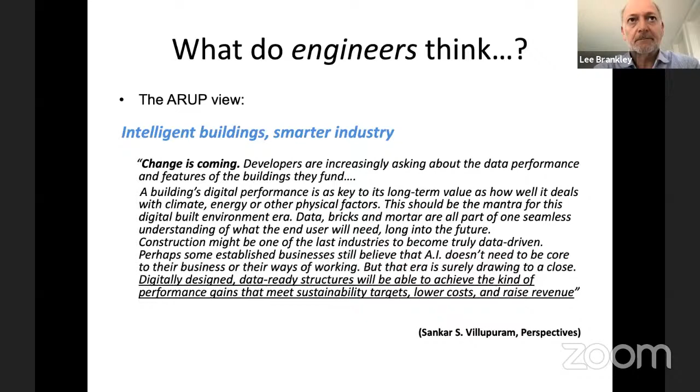But first, I want to go back and look at where we currently are and what has happened across our industry, both in the UK and elsewhere in the world, and how we can learn lessons where things haven't worked out as well as perhaps they should have done in a number of cases.

That brings our attention to a number of construction sector inquiries that have taken place, for example in the UK in relation to the Grenfell Tower, which many of you may be familiar with, a fire that took the lives of over 70 people, and has really been a wake-up call to the whole industry to ask ourselves those searching questions of what we're doing to ensure our structures are safe.

To ensure our structures are both structurally safe and sound, but also, more importantly, how do we ensure the structures are safe for the users, the people that live in those buildings in particular, how do we ensure their safety?

That has been an event that has changed the whole culture of the UK industry. We're now looking at a number of different changes across how products are specified, how they're marketed, how they're certified, and how the information relating to those products is shared across the whole supply chain. That is once again moving towards a digital environment.

There have been other instances, in the Opal Tower, for example, in Australia, and an incident with the MTR Sha Tin Central Station in Hong Kong. We follow these inquiries very closely and look to see what we can learn and how we can do things better.

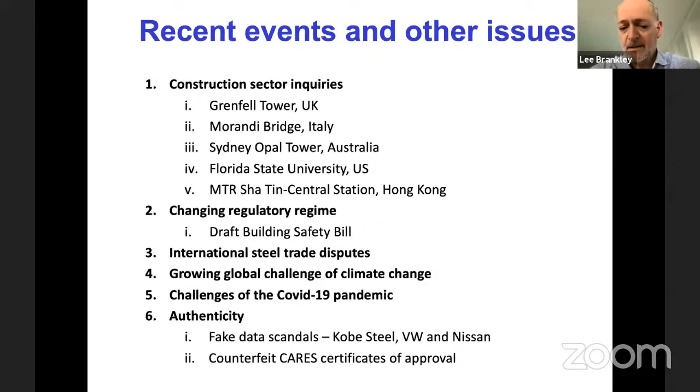We've also seen it with VW with the emissions scandal. And even as recent as the last couple of months in the UK, we actually saw a counterfeit CARES certificate of approval. Fortunately, the engineer was alert enough to call the CARES office and check the authenticity of that particular certificate, and we found it was actually a counterfeit.

That was quite a long introduction, but the contents of my presentation are going to look very much at CARES, a little bit more about our activities in the organisation, and then talk in more detail about the actions that we take away from the construction site in the supply chain to ensure the product quality is what it should be, and then provide some detail about our sustainability scheme and the contribution that we're making to addressing the challenge of climate change.

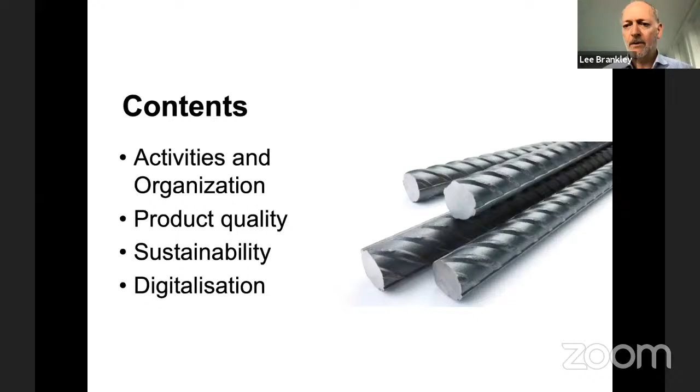More recently, over the last couple of years, we have accelerated our own digital adoption in the sense that we've had to adopt these new ways of working very quickly as a result of the COVID-19 pandemic. And we see that there are real opportunities for us to accelerate that digitalisation of CARES as an organisation, but also the digitalisation of the reinforcement value chain as well.

But firstly, just a little bit about CARES. We started in 1983, and it was a joint initiative between government and industry to provide confidence to the users and purchasers of reinforcing steel through a regime of regular third-party regulation, testing and inspection. That was our aim back then, 40 years ago, and it remains our aim today, and I think it will always be our aim in the future, that CARES is here.

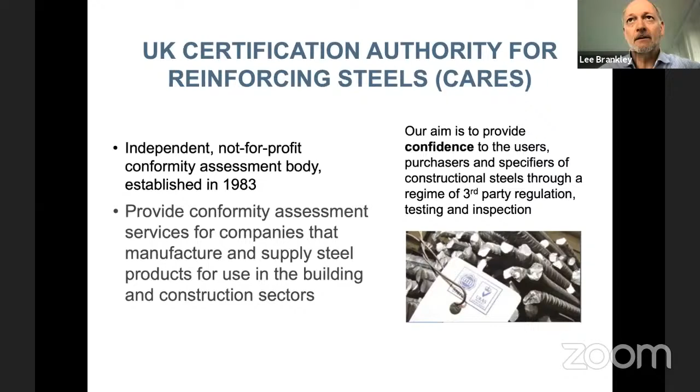We only exist to provide confidence to the users of the products that are certified by CARES and provide that trust in the supply chain that delivers those products to the construction site. And we believe that CARES is a unique relationship across the whole of the reinforcing steel value chain.

We have 4 key stakeholder groups that are part of CARES and are represented through our policy advisory committee to enable us to set the technical requirements for our schemes. In that way, we match the capabilities of the reinforcing steel supply chain with the needs of the clients and particularly the consultants.

So we have the 4 stakeholder groups represented within the CARES policy-making body, and they come together to establish the technical requirements that our auditors use to audit the companies in the supply chain too. They represent the clients and specifiers, consultants, contractors and manufacturers, so they have balanced representation such that one part of the industry doesn't dictate to the others. We believe over the 40 years of CARES' existence, that has been a unique partnership, has enabled us to set the requirements at the correct level and keep taking the industry forward in a positive direction.

The conformity assessment services that we provide are very much based around what we call our product certification scheme, and that focuses very much on the reinforcing steel standards. BS 4449, for example, is widely used in the UAE, but also the ASTM standards. More recently, we have been certifying to standards used in Hong Kong and Singapore.

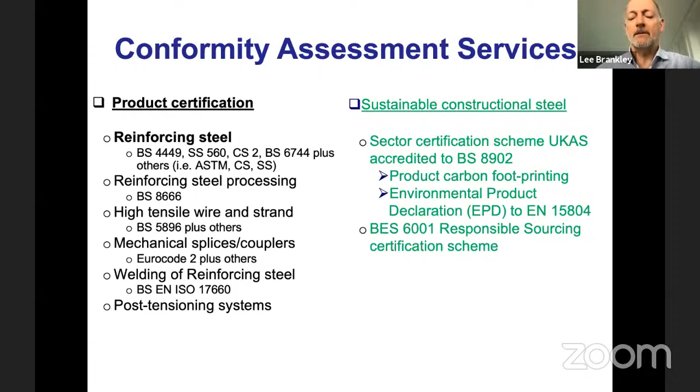CARES is the auditing body that checks manufacturer's capability and fabricators, but who checks CARES? Well, CARES is also audited by a number of accreditation bodies in the UK, that is UKAS, the United Kingdom Accreditation Service, but also in Singapore, we're audited by the Singapore Accreditation body as well.

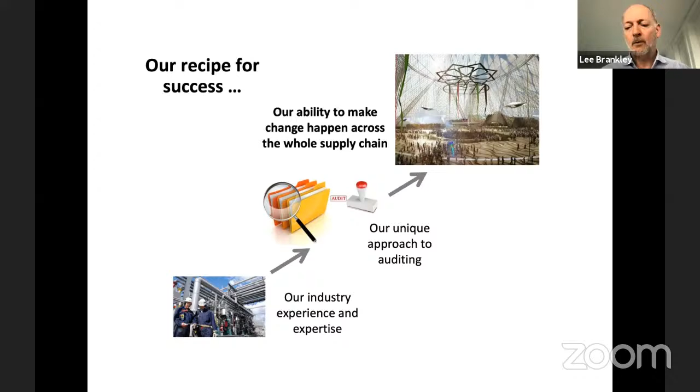And we also have a unique approach to auditing, which I'll talk about in a little bit more detail in a moment. Through stakeholder engagement with clients, consultants, contractors, and manufacturers, we have the ability to make change happen in a controlled way across the whole of the reinforcing steel supply chain.

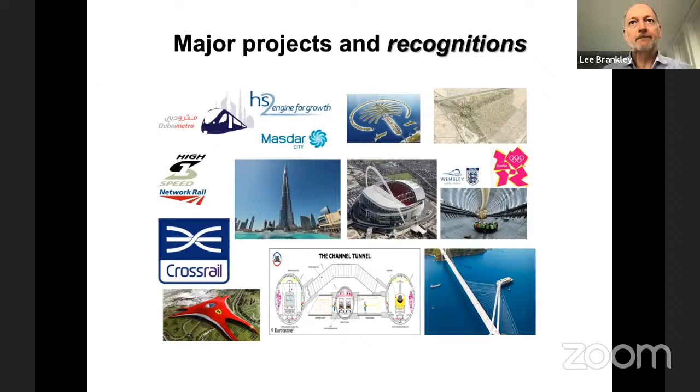Now to move on to the three aspects of CARES: what is it that we do to provide the assurance of product quality, and why can you have more trust in a CARES approved product compared to other construction products? We believe that it's through our unique approach to auditing that provides that extra level of confidence.

We also have a very high level of product testing, which includes independent testing as well, which I'll talk about in a moment. And we also have a unique CARES traceability system. But firstly, our approach to auditing.

To be able to provide that confidence in the product and also the trust in the supply chain, the CARES audit of a manufacturer of reinforcing steel, for example, consists of these three elements.

During the course of an audit of a manufacturer, the CARES auditors will be on site for at least 10 man days to assess the company against the ISO 9001 management system, but also take samples of the product and witness the testing of that product in the manufacturer's test laboratory.

And during that process, we will also ensure that the machines used for testing that product are calibrated, and those calibration certificates are traceable to national standards.

So our emphasis is first and foremost on the product and the compliance of the product to the standard. And then clearly manufacturing processes—a number of complex manufacturing processes are used to make that reinforcing steel product, and they have to be properly controlled.

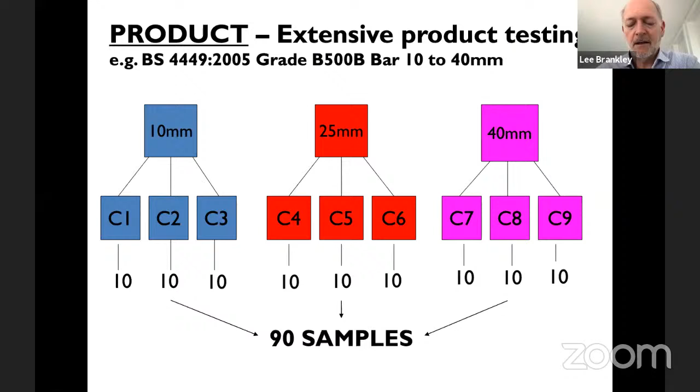Other sizes of the product are taken from that approved size range. So in this case, if initially approved for 10 to 40 millimeter, at the very first audit they would probably sample 16 or 20 millimeter, for example, and we'd cover the whole size range over a period of time. So it's an ongoing commitment to quality by the manufacturer with a very rigorous auditing regime associated with it, providing that very highest level of confidence.

If we look now closely at a certificate of approval issued to a manufacturer, you can see at the top of the certificate we've now introduced a static QR code. That provides us with the ability of using the CARES Cloud app to scan that static QR code and verify whether or not that's a valid certificate, because it's becoming a little bit too easy to create counterfeit certificates.

So whenever you're specifying the CARES approval, you need to get the certificate from the manufacturer and the processor and scan that static QR code, just to make yourself absolutely sure that it is an authentic CARES certificate, because that goes automatically to the CARES Cloud database and will give you in real time verification that it's a CARES approved certificate.

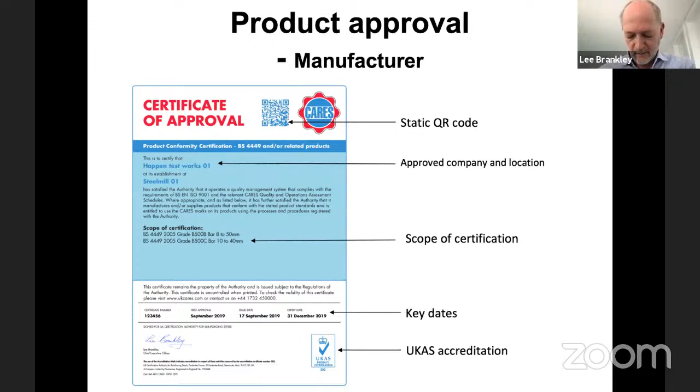And then uniquely for a construction product as well, we introduced a marking system for each individual piece of reinforcing steel bar. So this bar mark, as we call it, appears at least once every 1.5 meters on each individual piece of rebar from that CARES approved manufacturer.

And that marking starts with the CARES mark, the dot dash dot. The country is the next part of the marking, and then the final part is the mill. So it really is as simple as 1, 2, 3.

One of the ones that you may be particularly interested in is the environmental product declaration, which includes the carbon footprint, or what we generally refer to as the global warming potential as well. I'll talk a little bit more about that in the next couple of slides.

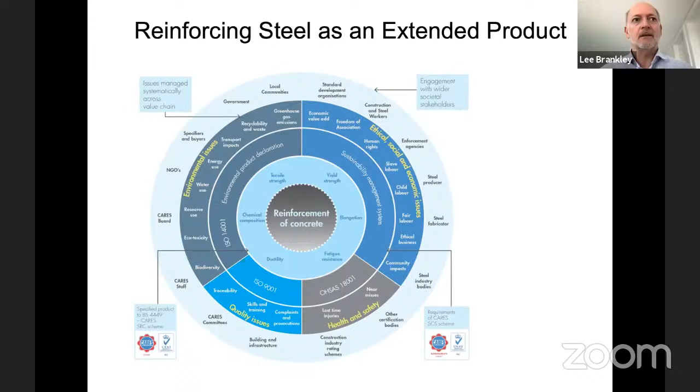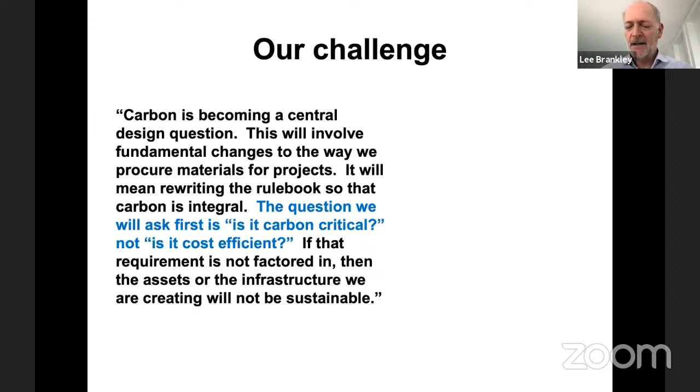So this is where I sort of like to ask all of us collectively, particularly now in relation to climate change, the challenge about this is a quote made some years ago from a leading engineer, and he basically asked the question of all of us. We should be asking: is our design the most carbon efficient? Because we should be looking through the lens of carbon now for all of our future designs.

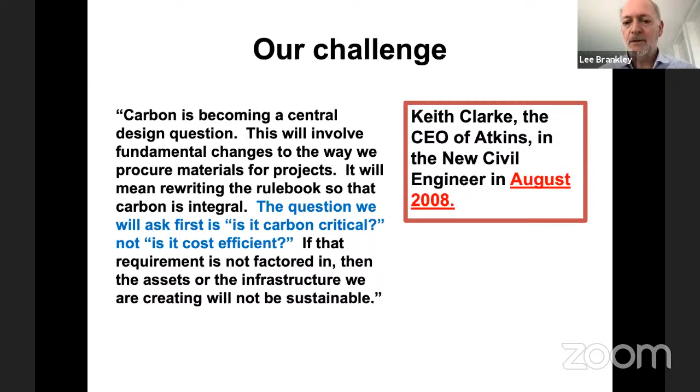But sadly, that question was asked back in 2008, as I mentioned at the beginning. Unfortunately, I don't believe we've made as much progress as we should. But as we approach now the intergovernmental conference coming up in Glasgow later this year, called COP26, there's going to be a whole new renewal around embracing and looking at all of our designs from a carbon perspective. And fortunately, because CARES introduced this scheme over 10 years ago, that data in relation to the carbon footprint from the reinforcing steel from those CARES approved producers is readily available.

And just looking a little bit more closely at the environmental product declaration, you have to draw the system boundary, which in the case of reinforcing steel covers the transport from raw materials, the steel making and casting, the rolling operations, and then the transport to the processor, processing by the processor, delivery to site, installation and use.

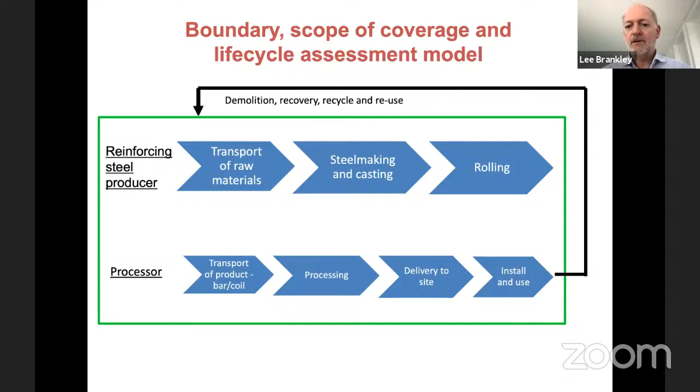So it covers the whole life cycle of the reinforcing steel product. And then what does the EPD look like?

Well, this EPD is taken from the BRE website, BRE Green Book Live, where we can go and obtain all of the CARES EPDs.

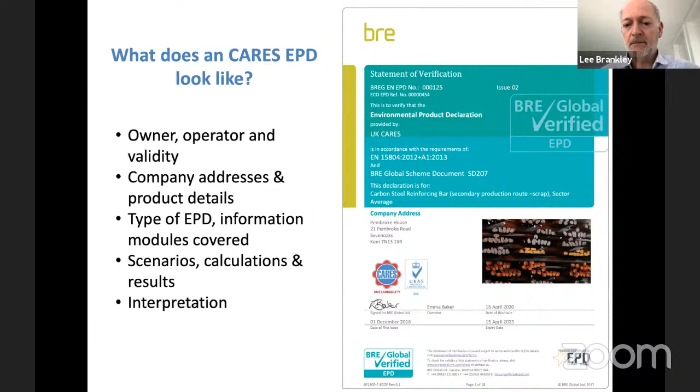And this is a particularly useful one because this is what we call a sector average EPD. It takes a number of manufacturers of the same reinforcing steel product using the same manufacturing process, in this case scrap-based electric arc furnace production. So you can identify what a typical value is for that particular steelmaking route and for that reinforcing steel product, and use that as a benchmark to compare for your initial design. That information is readily available to you.

As with all of our schemes, we regularly review and update their technical requirements from time to time. And we've recently launched a new version of the scheme, which will provide a summary performance certificate looking at the product quality, the environmental aspects, the social aspects, and the economic aspects.

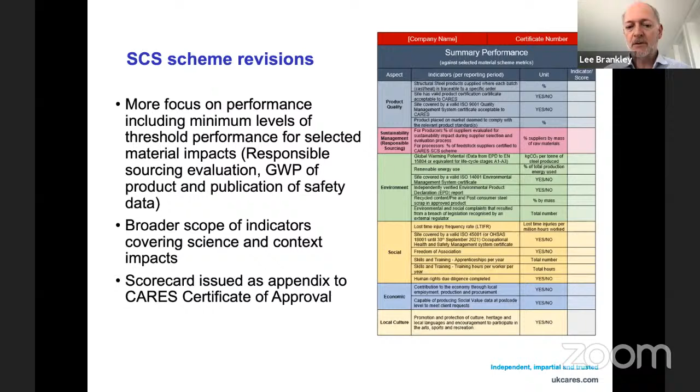A further element of sustainability is the local culture—what is the company doing to promote and protect the culture, the heritage, and the local languages, etc. That's really important because we know that the steel manufacturers and the communities where they're located are really the heartbeat of those local communities in terms of the value they bring, career opportunities, and really good jobs for the people that work at the steel companies.

Our third leg is around digital transformation. What are we doing as CARES to try and facilitate the adoption of digital working across the whole of the reinforcing steel supply chain? So we have taken a technology-driven approach based on our leadership across the industry, and it's one of those areas that really does need creative thinking, innovation, and most importantly, collaboration.

Because when we want to provide the information to others in the supply chain, we have to ensure that there are proper rules in place and protocols about sharing the information.

And I mentioned earlier that in many other sectors, there is the ability to see exactly what product or component was installed in that particular structure. But unfortunately for the construction sector, it isn't yet possible to be able to do that.

But one of the important things moving forward will be what we call the digital golden thread of information, which will be the product test results for a particular batch of steel rebar that has been made and then travels across the supply chain and is used on a particular project. We'll be making that available through our digital traceability system.

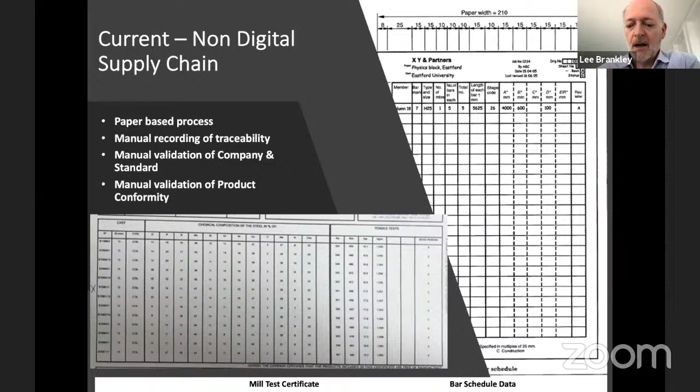Because at the moment, you're probably seeing lots of these paper-based documents being passed around, whether it's what's referred to as a mill test certificate, shown there in the bottom left, or a reinforcement bar schedule. So we're probably still seeing faxed schedules, emailed schedules, and all things in between.

So what we have been working on over the last couple of months is to try and better understand the reinforcing steel process, and then how that is developed across three main processes. The first one that we have to do is to ensure that the building is constructed in a way that it satisfies the design codes.

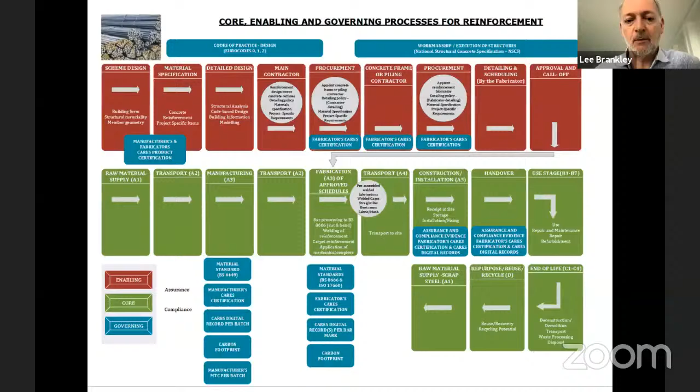And just to look at that in a slightly different way, the CARES digital supply chain is looking really at the steel maker, the manufacturer, and the steel fabricator. Already, we have developed what we call the CARES upstream cloud, which is for the manufacturer to upload the test data in relation to the products that they're releasing under the CARES product conformity scheme. And when they upload that data, it also goes through a validation process to provide, once again, that higher level of assurance that any reinforcing steel product that carries the CARES mark has been through this additional validation process, and its results are available from the upstream cloud.

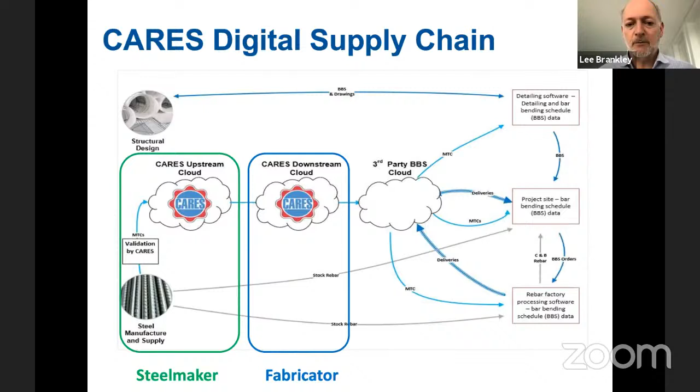And then currently under development is what we call the CARES downstream cloud, and that's for the reinforcement fabricator who receives the physical material from the manufacturer and then processes that into cut and bent material before they deliver it to the construction site. And during that fabrication process, the fabricator is required to use the downstream cloud to make the relationship between the construction site, which is effectively the bar bending schedule, going down the supply chain, but then going up the supply chain, we're able to make the relationship between the individual cast or batch of reinforcing steel and the results that are available from the CARES upstream cloud. So that would make the process much more efficient, much more robust, and much more reliable and trustworthy.

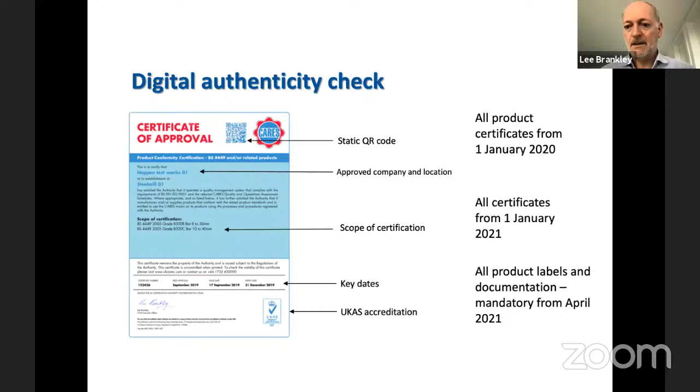As I mentioned earlier on, we have the ability now to undertake a digital authenticity check by scanning the static QR code on the CARES certificates of approval. And why is that necessary? Well, because we have seen fake certificates emerging in the UK market. As I said, fortunately, when it was presented, the person it was presented to was aware of CARES and knew to phone the office and determine that it was actually a fake certificate.

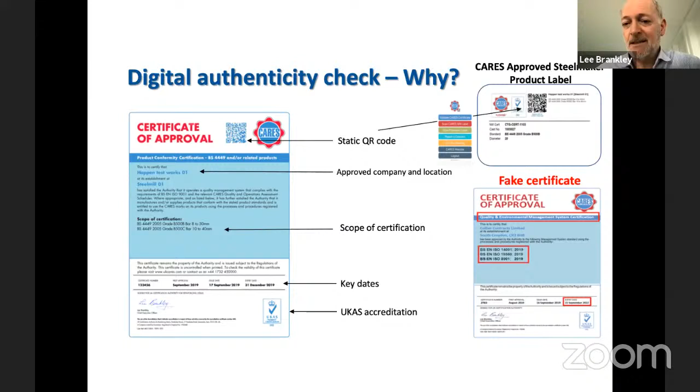And then the other thing we can do now as well, with the static QR code, is that it's also going to be available on each individual label from the manufacturer of the reinforcing steel, and also the processor of that reinforcement steel. So when it arrives on site, you can scan that static QR code, determine who supplied it and what their scope of approval was at that particular time.

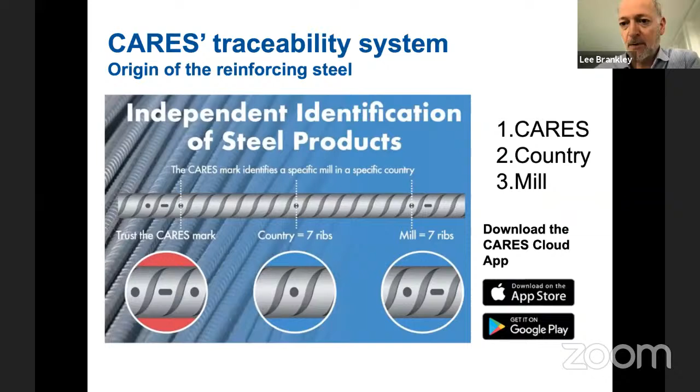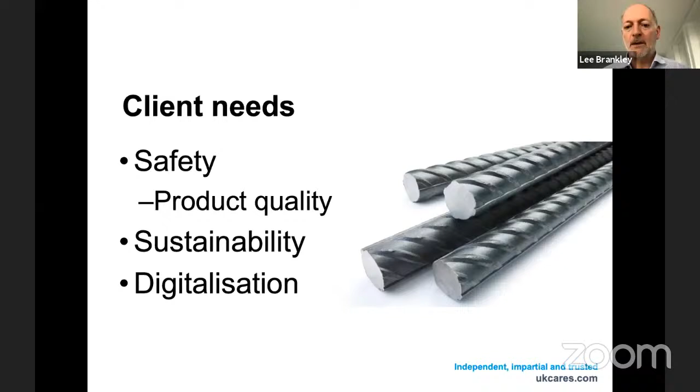And then just to emphasize, the traceability system, yes, it is really as simple as 1, 2, 3, CARES, the country, the mill, and then you can be confident that that rebar will have the highest level of assurance in relation to its compliance with the particular standard. And by bringing these three aspects together, the product quality, the sustainability, digitalisation, we really can meet the needs of the client to build those safe structures and ensure that the key information relating to the products in those structures is going to be available for the lifetime of that structure.

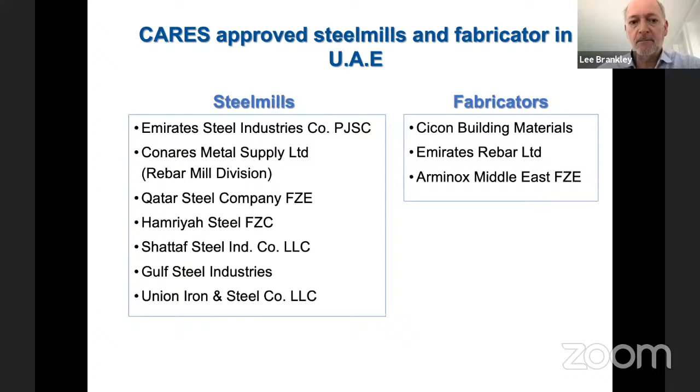They want to be accountable for what they do and really embrace the CARES assured supply chain. That's Cicon Building Materials, Emirates Rebar, and Arminox Middle East for stainless steel rebar, because that's also covered by the CARES scheme. So I've spoken very much about what we can do for you, but what is it that you can do for us? To have that highest level of confidence in the product and the supply chain that provided that product, then review your project specification clauses. What are you saying about materials, particularly reinforcement, and what quality assurance do you require for reinforcement?

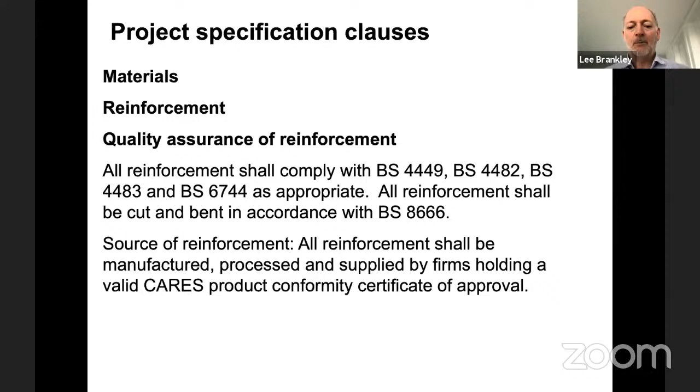So to ensure you get CARES approved reinforcing steel for your projects, these are the recommended specification terms to use. All reinforcement shall comply with BS 4449 and shall be cut and bent in accordance with BS 8666. As for the source of the reinforcement, all reinforcement shall be manufactured, processed and supplied by companies holding a valid CARES product conformity certificate of approval. So as you can see, the manufacturer has to be CARES approved, the processor has to be CARES approved, and then you can have full confidence in the supply chain.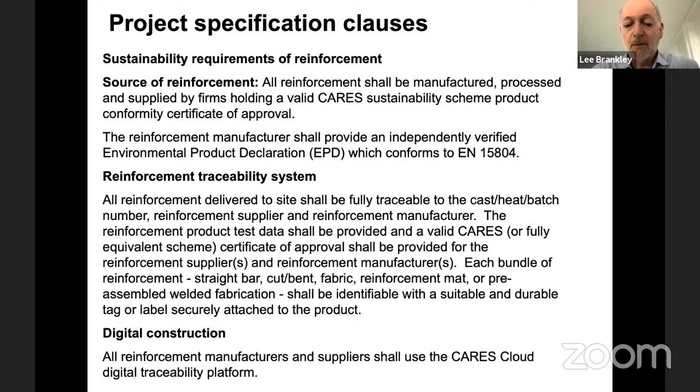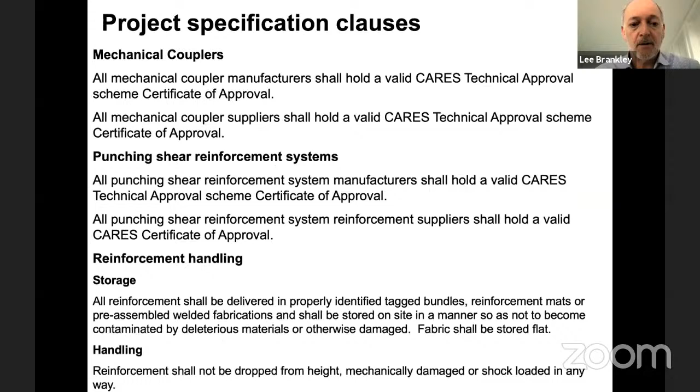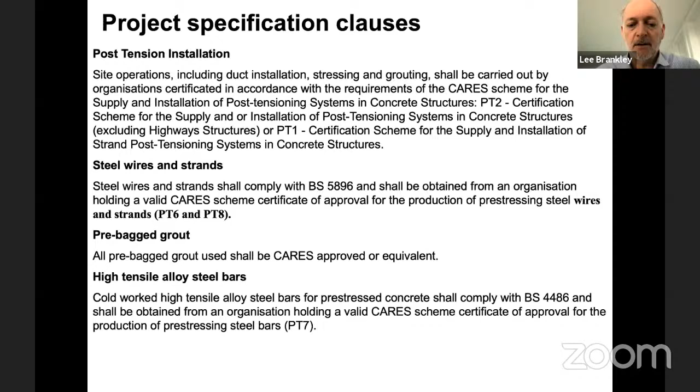We also mentioned the sustainability requirements and the traceability system in more detail, and also to embrace digital construction, specify the CARES Cloud digital traceability platform. We have a whole range of other products that we also certify for welding, continuity strips, mechanical couplers, punching shear reinforcement systems, and post-tensioning systems. We're working very closely with Dubai Municipality and other stakeholders to improve the post-tensioning industry and bring it up to the right standards, and also wire and strand.

Thank you very much for your attention, and I'll be very happy to take any questions that you may have on what I have presented.

So we provide a free trial which is valid for 2 weeks. Please feel free to download the trial and have a demo. It's available on our website. For any further questions or other information, you can send us an email, and these are my contact details. So I hope it's clear.